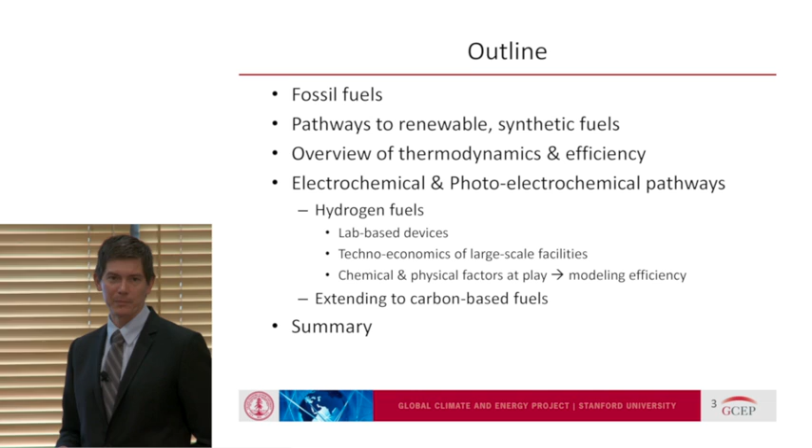Okay, that's the global consumption. And very importantly, 80% of that is coming from fossil fuels—one way you could define a fuel. Fossil fuels: coal, natural gas, and oil—solid, liquid, and gas. The convenient thing about this analysis is that globally speaking, oil, coal, and natural gas each provide about one-to-one-to-one energy across the globe. It's not exactly that, but it's a good first order approximation.

Of course, energy consumption is continuing to grow. So one of the main points I want to make is that fossil fuels are the dominant form of energy across the globe. If we could produce these types of fuels in a more renewable and sustainable manner, that's already plug-and-play with our entire infrastructure, and it avoids all the issues that fossils bring with them. That's why synthetic fuels are interesting, generally speaking.

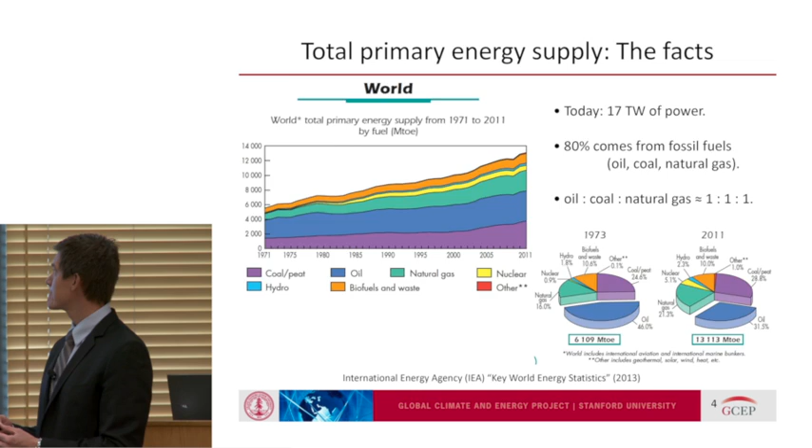Let's talk about fossil fuels in a bit more detail. I want to go through a few thoughts on why I think fossil fuels are so wonderful, actually. So let's consider petroleum and gasoline.

First of all, it's a massive worldwide resource. If 17 terawatts is coming from fossil fuels, at about one-to-one-to-one of oil, coal, and natural gas, making up that 80% total, then about 5 terawatts is coming from petroleum alone. That's a massive amount of energy. There are always concerns globally about running out, but my goodness, we use it quite extensively.

It also has a massive energy density. You can drive a car about 500 miles on just one tank of gas—not some super massive gasoline tank car, just a Toyota Camry or Honda Accord with an 18-gallon tank. And you can fly a commercial jet halfway around the Earth. If I needed to get to Frankfurt in 15 hours, I could race to the airport right now and catch a flight there without refueling or stopping. It's amazing how much energy you can put into these vehicles.

A full tank of gasoline in a car is approximately equivalent to the potential energy of 1 million gallons of water sitting 200 feet above my head—imagine that crashing down on us right now. It's also about the electrical energy stored in 80,000 iPhone 6 batteries. Just one tank of gas, in just one car, like a Toyota Camry.

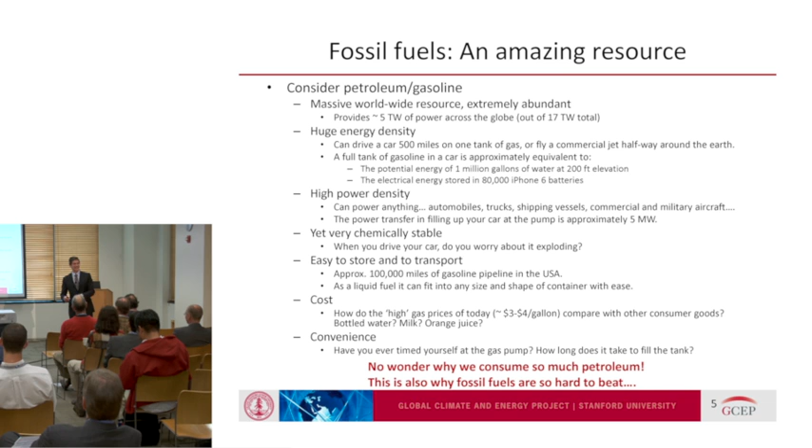So I get in there, and I pull out my credit card, and I'm trying to be fast, and it takes me 3 minutes. 3 minutes from the time I hop out of my car, I've paid for the gas, punched in my zip code, stick it in, fill up my tank, and pop it back in. Remember, it's 6 gallons a minute. So if you have a 15-gallon gas tank and you go in at a quarter tank left, that'll take less than 2 minutes probably to fill. So it's actually really, really fast.

So 3 minutes in and out of a gas station - how much time, if you had no life on your cell phone battery and you plugged it in for 3 minutes, would that give you for talk time? You'd be lucky if you could even turn on your phone on 3 minutes of plugging it in, and that's a very low power device. Here, I go from an empty gas tank to being able to drive to Los Angeles in 3 minutes. So these are all the wonderful advantages of fossil fuels.

It's no wonder why we consume so much petroleum, and it's also why these things are so hard to beat. Fuels are absolutely amazing and spectacular, and of course they come with a lot of baggage - a lot of problems with fossil fuels. So we have to find other means of using energy, producing energy, converting energy. But this also motivates: if you could produce a fuel that does all of this for you, but doesn't have a CO2 issue, a climate change issue, or geopolitical issues, that would be a nice technology to have. That's exactly why we're having this session today - new routes to these types of chemicals without all the baggage from fossils.

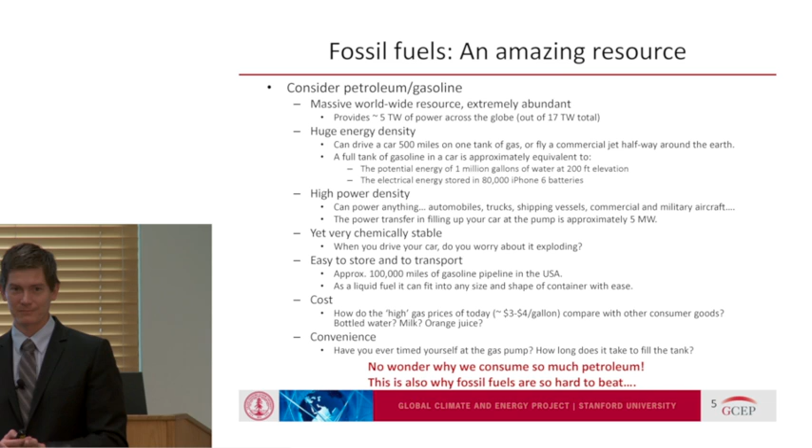All right, so let's talk about what these chemicals look like. Everything we talked about with coal, oil, and natural gas - the simplest description I'd give, if I were talking to a 5th grader, is it's just a bunch of carbon and a bunch of hydrogen mixed together as chemicals. Those are the two main ingredients, and there's a lot of carbon-carbon bonds and carbon-hydrogen bonds.

Now we're going to escalate it to high school chemistry, carbon and hydrogen bonds. When you start ripping out these bonds, that's where you get the energy release. When you burn these things, you get the energy release that allows us to drive our cars.

This is a class of compounds called hydrocarbons for obvious reasons. They have hydrogen, they have carbon. Here we're looking at pretty much the difference between natural gas, the more liquid fuels like gasoline and diesel, motor oil, plastics like your milk jugs, and coal, which is similar though more two-dimensional in nature. It's basically a bunch of carbon-hydrogen bonds. So it's really the same type of bonds that you're burning for all these types of fuels.

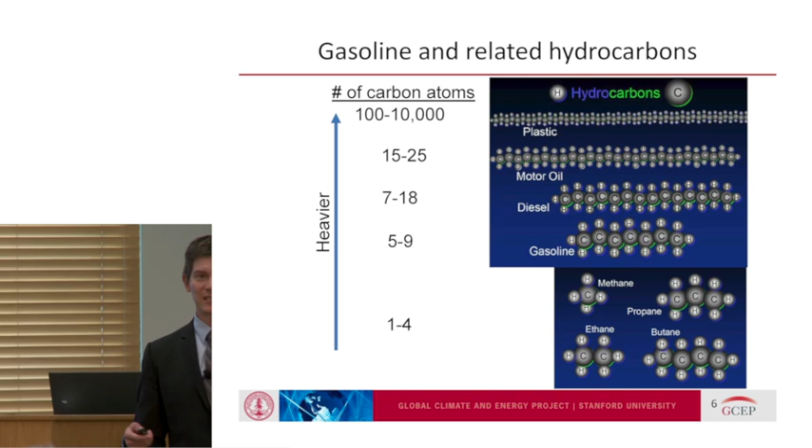These are really small: methane, ethane, propane, butane. This is what you get out of natural gas reservoirs. They're so small that gives them the physical property of being gases at standard temperature and pressure. If you start linking them, you get more liquids, and ultimately you get to solids. But at the end of the day, it's the same type of molecule. These are the molecules that provide all those services we were just describing.

How do we get them? We get them from the ground. We grab oil that comes from underneath, and it's not like there's this big swimming pool of oil down there. These are basically rocks. The rocks are very porous, and infused inside the pores you have these molecules, and we find clever ways to flush them out from inside the pores of the rocks. We pull them out, pump them out, and put them into an oil refinery, which is one of the most spectacular examples of modern technology.

When I was growing up, I used to see refineries and thought they were just the ugliest thing, a bunch of concrete and metal. But now I realize what they do and how well engineered they are. One single facility can take in 150,000 barrels a day of crude and do all the chemical processing needed to make them usable in different technologies, whether it's a diesel truck, aviation, a jet, a car, asphalt, or to grab sulfur. It's amazing, and these chemical plants are extremely important.

There are about 700 refineries worldwide. Each one takes in on average about 100,000 barrels of oil, just to give you a sense of scale. We do this every day without even thinking, because they're optimized and engineered so well. It's really a marvelous technology.

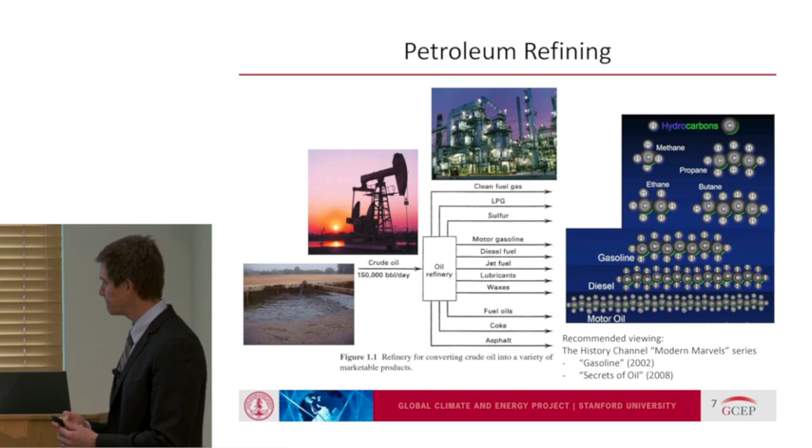What if you wanted to synthesize diesel or gasoline but couldn't use petroleum? This is another definition of synthetic fuels, a more conventional approach. Basically, if you can make carbon monoxide, CO, and hydrogen, H2, we have large, well-working industrial modern processes that can convert that carbon monoxide and hydrogen into just about any liquid fuel you'd want.

If you really wanted to, you could grab something like coal, or even biomass. You could grow plants and feed them into a process where you effectively make your carbon monoxide and hydrogen. Then you use another reactor for water gas shift, and then do what's called Fischer-Tropsch and some product upgrading, and out the door come things like naphtha, diesel-type molecules—all the things we would conventionally get from petroleum.

What I'm showing you here already exists at large scale. There are plenty of chemical plants around the world, $10 billion to $20 billion investments, that can do exactly that. You can feed them biomass, waste, natural gas, or coal, and they can basically make these liquid fuels.

Could you briefly explain what water gas shift is? Sure. Water gas shift is: if you feed CO and H2, you can shift the stoichiometry to CO2 and H2, balancing out hydrogen and water. So the reaction is—I should have written it out.

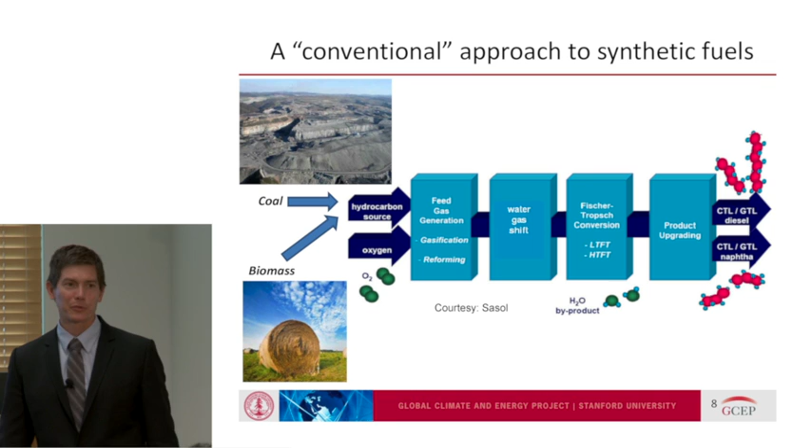Question: How is that different from steam reforming, or is it? Steam reforming is a process where hydrocarbons are coming in. So steam reforming would actually fit into this box of gasification and reforming, where that's what's going to produce your CO coming out here. When you reform methane, for instance, you're producing the CO and H2 that then goes into the water gas shift, and the water gas shift will tilt the balance how you want it, such that it can do the rest of the chemistry to make the product you desire.

Excellent, great. So those are conventional processes. Let's take a look at the map of these different fuels one might want to make. This is volumetric energy density, megajoules per liter, plotted against gravimetric energy density in megajoules per kilo.

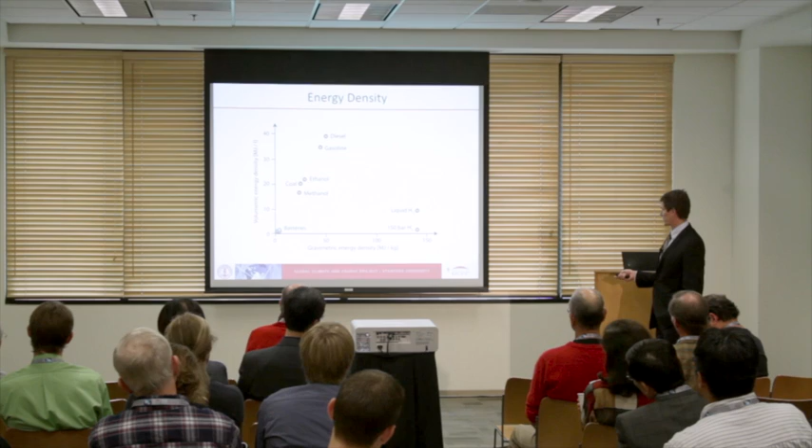Here's diesel and gasoline, and as you can see, they're phenomenal on both metrics. They're very great fuels from an energy content standpoint. I already described how wonderful they are in terms of energy density. Batteries are down here, just so you know. And by the way, I'm not trying to say that fuels are always better than batteries. I think in this game of energy, you can't just put all your chips into one bucket of possibilities.

If we're ever going to compete with fossil fuels globally - this is now more of a personal opinion on the matter - I don't think we can look for that one silver bullet that's going to take care of everything. I think we need a combination of technologies. And batteries have a tremendous role to be played in all of this.

But if you want to look strictly in terms of energy density, clearly these chemical bonds in hydrocarbons are much more rich, and the chemical bonds in hydrogen as well. So H-H bonds are fantastic sources of energy. You can see on a gravimetric density basis, they're huge. But on a volumetric energy density, they don't compare nearly as well, because hydrogen doesn't want to be in the condensed phase - it much prefers to be in a gas. Whereas these are very natural liquids.

So everything you see here - diesel, gasoline, coal, methanol, and hydrogen that we produce - everything except for ethanol, all these other chemicals are all coming from fossil fuels today. That's the modern situation. Any hydrogen that comes around - we'll talk more about hydrogen in a bit - that hydrogen is really coming from the ground ultimately, usually from natural gas. Ethanol is the one exception. There really is no good industrial process to make ethanol from syngas, as I talked about on the previous slide. If you can make carbon monoxide, you can make hydrogen.

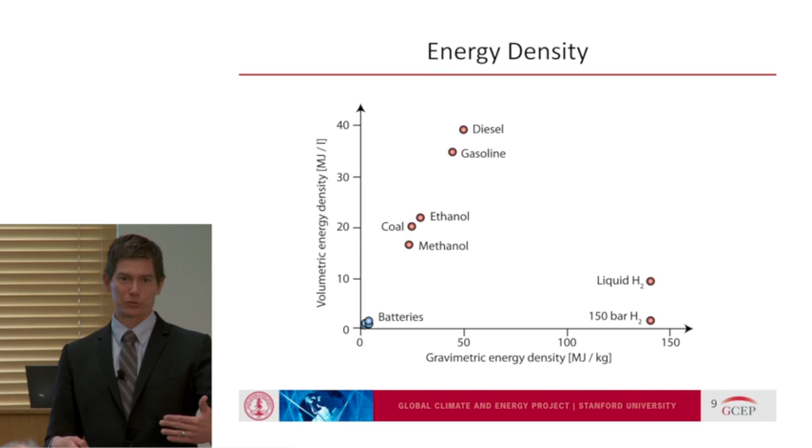Okay, so this is the broad vision. Those of you at the technical talks yesterday saw this slide where we want to make these types of fuels — wonderful in terms of energy density. Let's think of a black box as your typical engineering analysis. You feed it three things: sunlight, water, and CO2. We know there's lots of sunshine coming down on the Earth — orders of magnitude more energy striking the surface than we actually need, so even grabbing 0.1% of that would put us in great shape. Water is extremely abundant, we're all breathing it right now, and of course we're all breathing CO2 as well, at 400 parts per million and climbing.

So you take these feedstocks, feed them into this black box, and ask it to break apart some bonds and reform bonds elsewhere. Then you can make things like oxygen as one output stream, which is something we all need — not a bad product, though it has very low value since we get it for free from the Earth. But then there are things we conventionally get from fossil fuels that would be great to instead get from these renewable sources: hydrogen, carbon monoxide — this is pretty much the water gas shift type of reaction we're talking about. We can also make alcohols, hydrocarbons. These are all very good fuel molecules.

So option one is you can use anything on this slide, plus a whole lot of other possibilities, as fuels. Or you could use them as chemical products — a lot of these are important chemical products for the manufacturing industry. Or if you didn't make the exact thing you want, you could use these as chemical precursors. Hydrogen, carbon monoxide, methanol, ethylene — these are what we call platform chemicals. If you can make these chemicals, you can plug them into the modern chemical infrastructure and it'll crank out just about whatever you want. So we have a lot of control there. That's the broad vision.

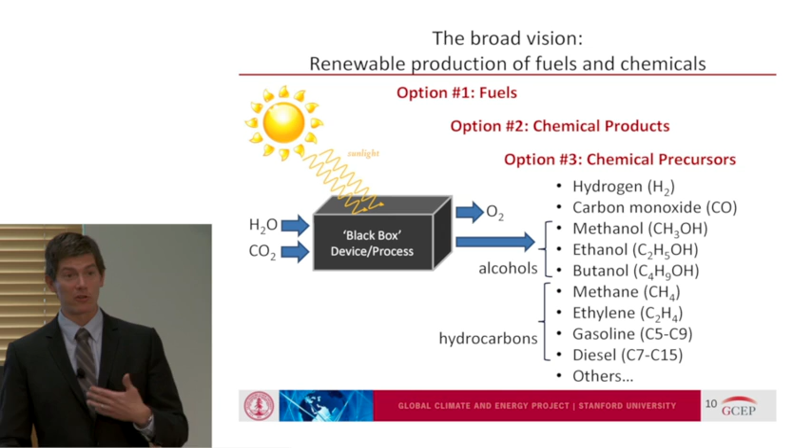Plenty of different ways to do it have been shown in the laboratory. The question is, what's going to be cost effective? Because if it can't compete against the price of fossil fuels, it's going to be a big uphill battle. So some are going to have inherent advantages along that direction compared to other technologies. That's very important to bear in mind.

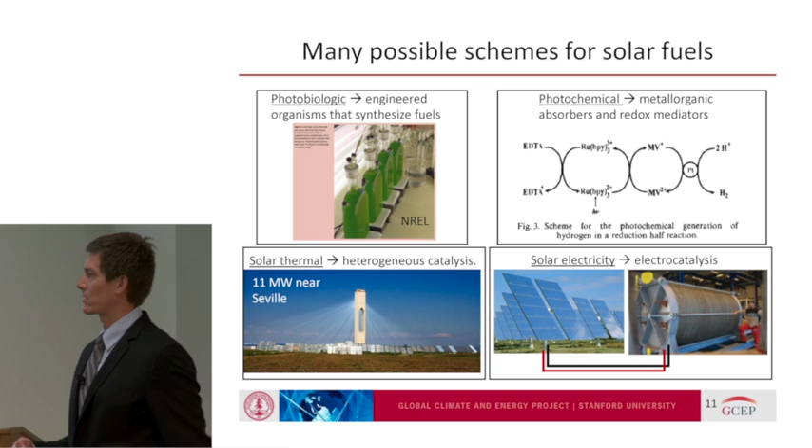There's a lot of ways that you can synergize technologies, and that's up to our own imagination and creativity. What I'll be talking about today, because there's a lot to be said about all these technologies, I want to focus on a couple of schemes that I think are particularly promising.

One is very related to what I just showed on the previous slide: you take conventional energy technologies like wind and solar, which are obviously being deployed massively across the globe already. Can you make a device such that it's cost effective to feed in water or feed in CO2 plus water, and then make the fuels and chemicals that we need? If it came from CO2 from the atmosphere, it's perfect, because then you make a fuel from atmospheric CO2, you combust it in the car just like you always would, and then it just goes right back in the atmosphere that you can recapture, and now there's no net emissions of CO2 in that cycle. You're recycling the CO2. That's one way to do it.

Another way to do it is to have, instead of two separate devices, one integrated device. This basically looks like a bunch of semiconductors, a bunch of photovoltaics dunked under water with some source of CO2. You shine light, and your semiconductor does the same thing that this semiconductor does, where you excite electrons. But in a typical photovoltaic, you're running these electrons and the positive holes that are left behind around a circuit and getting voltage and current out of it. In this case, you're not running them around a circuit. You're just instantly using that electron and that positive hole to do redox chemistry, to do the chemical transformations needed to go from CO2 to methanol or water to hydrogen.

So these are the two types of technologies I want to focus on. A major issue with this is making good catalysts for these chemical transformations. Another one is making good semiconductors that can absorb light and do all the processes you need it to do.

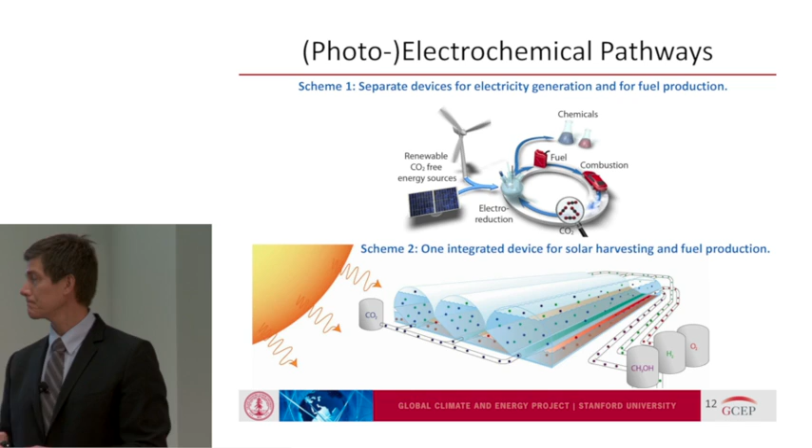So let's talk a little bit about that chemistry, and then I want to get into some of the technical aspects for a moment. I will zoom back out and we'll look more into the big picture in a moment. So don't let these slides scare you too much.

So what we're looking at is a bunch of reactions that we would like to drive. I mentioned the electrocatalysis 101 tutorial that I had given a couple of years ago, where I went into this in great detail—that's for those of you who might want to take a look if you want to beef up your knowledge in this area. But for now, I'll just go through this so that we can capture what we need to move forward and understand the big picture better.

So if you want to make hydrogen, here's one way to do it: 2 protons plus 2 electrons goes to hydrogen. We're going to put this on a voltage scale, which by definition we're going to define this reaction at 0 volts, meaning that if you had an electrode and stuck it under water at 0 volts potential, the backwards and forwards reaction should be going exactly equally fast. Then you can tilt which direction you want it to go—either protons plus electrons goes to hydrogen, or hydrogen gets oxidized to make protons and electrons. You can tilt it based on where you stick your electrode potential versus that 0.

Now here's a bunch of very interesting reactions with CO2: CO2 to carbon monoxide, methanol, some hydrocarbons, some alcohols. These are all really nice things that we'd love to be able to make from the CO2 and water that we're breathing right now. So we're going to pay really close attention to these reactions. And then this other reaction here is going from O2 plus protons plus electrons to water, or the other way around—you split water and you end up with oxygen, releasing some protons and electrons.

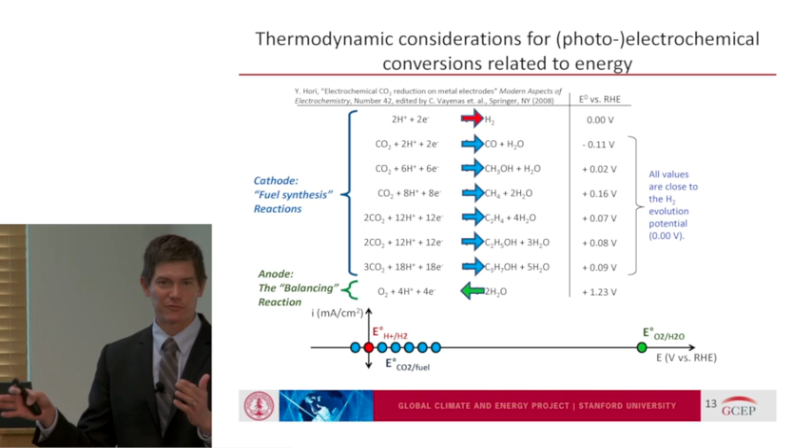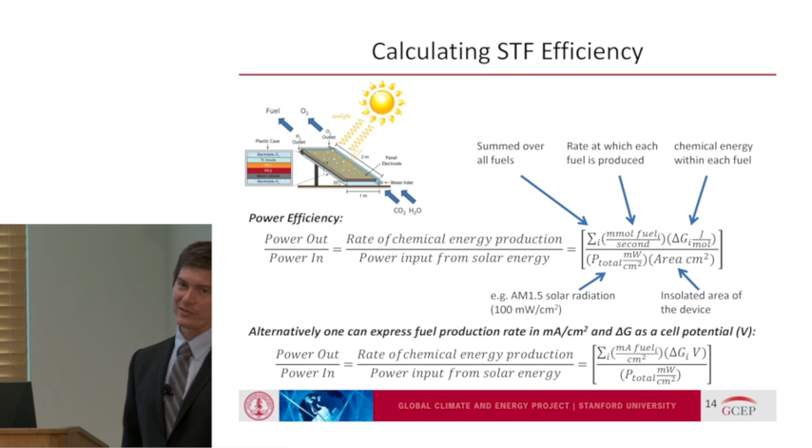Alternatively, there's another way to express all of this. You can express your delta G rather than joules per mole or kilojoules per mole as a voltage, like from the previous slide, and then multiply voltage by milliamps, which is a rate of reaction, how many milliamps per square centimeter you're making your fuel. Multiply those two and you get milliwatts, then divide by the milliwatt per square centimeter of the solar radiation. That's another way to come up with this expression.

Obviously efficiency will always be an important parameter. This is STF, solar to fuels efficiency, and this is true for any scheme. No matter how you make your fuel, if sunlight is your input, this is how you can define an efficiency.

If you want to use solar to hydrogen efficiency as an example, then you just plug in the numbers for hydrogen, which is 237,000 joules per mole and 1.23 volts, and you can get your efficiencies. Of course, an expression like this would insinuate that 100% of your current goes to water splitting instead of some byproduct.

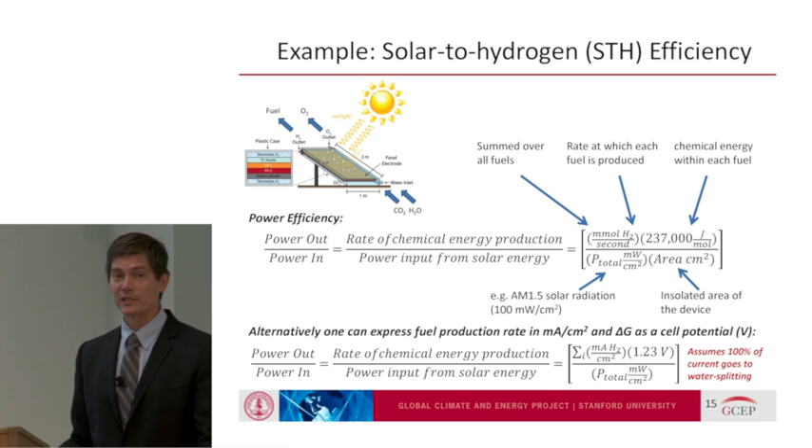So what did we talk about? We talked about fossil fuels, pathways to renewable synthetic fuels. We motivated by saying fuels are great, we'd love to make them renewably and sustainably. We talked about some of the thermodynamics we need to consider and the efficiency involved. Let's start talking a little bit more about the technology in these domains of electrochemical and photoelectrochemical pathways.

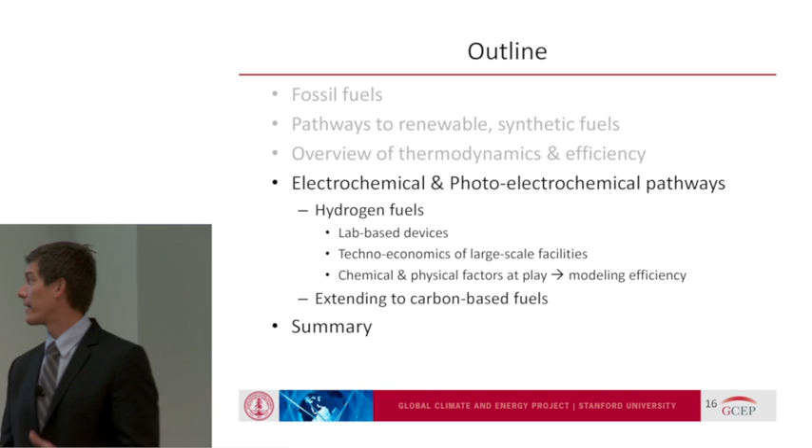Let's talk about hydrogen first, because that's where the technology has developed fastest, and we can leverage that when we talk about extending it to carbon-based fuels.

So hydrogen, first and foremost, if you walk away remembering nothing else, remember that we already use an awful lot of hydrogen. In fact, in 2007, we estimated consumption at about 65 billion kilograms that year. And we all know there's 7 billion people on the face of the earth, so that means every man, woman, and child was responsible on average for 9 kilograms of hydrogen being made per person. That gives you a sense that if you could make that hydrogen renewably instead of from fossil fuels, you could put a dent into the energy problem. That's how I view numbers of that scale.

So it's about a $100 billion industry and already represents about 2 to 3% of global energy consumption just going to hydrogen production.

Is it mostly used in chemical synthesis? Absolutely. What chemicals do you think we're making? It is used in plastics, fertilizer and petroleum. Absolutely, those are the two biggies. So ammonia synthesis to feed people, right? We would not be able to sustain 7 billion people on the face of the earth if we relied on the standard nitrogen cycle.

The Haber-Bosch process takes the nitrogen that we're breathing right now, the 78% in air, and combines it with hydrogen that comes from fossils, usually steam methane reforming, so from natural gas. To make the hydrogen, you put H2 plus N2 and do all that catalysis to then make ammonia, NH3, and of course that's the primary ingredient of fertilizer.

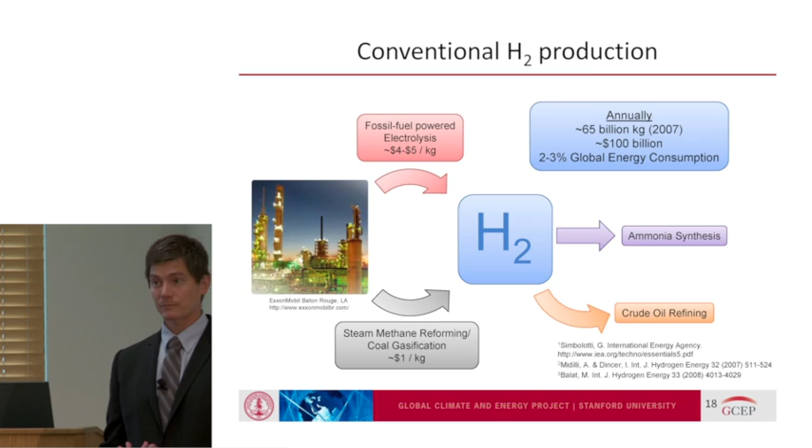And I wanted to just give you guys a really quick state of fuel cell cars today on one slide.

Fuel cells have had a really interesting history. About 20 years ago, nobody was thinking about the energy problem. Then about 15 years ago, around 2000, people started realizing something might be going on, and hydrogen came into the spotlight. People were saying hydrogen is going to save all of us, with hydrogen cars, etc. But that technology was not ready for prime time, and it took a beating as a result. It just wasn't ready for that type of discussion.

A lot of excitement over fuel cells really waned between about 2005 and 2010. The federal government started backing off of it too. But a really interesting thing happened: the car companies didn't back off. In fact, they kept pushing forward. And all of a sudden the government said, whoa, GM is still working on this, Toyota is still working on this, and Honda is still working on this.

So where are we today? Now there's been over 3 million miles driven on hydrogen fuel cell cars, over 27,000 refuelings. Basically almost every major manufacturer is putting out these cars. Hyundai just announced 500 Tucsons on hydrogen fuel cells being leased now in California. And Toyota just announced that the very first commercial fuel cell vehicle goes on sale in California in 2015.

So here it is. Now you can actually buy a fuel cell car, which you couldn't say even a year ago. It's going to be about $65,000, which isn't cheap. But these things get a range of 300, 400 miles, and they fill up in about 5 minutes. Sounds like a gasoline-powered car.

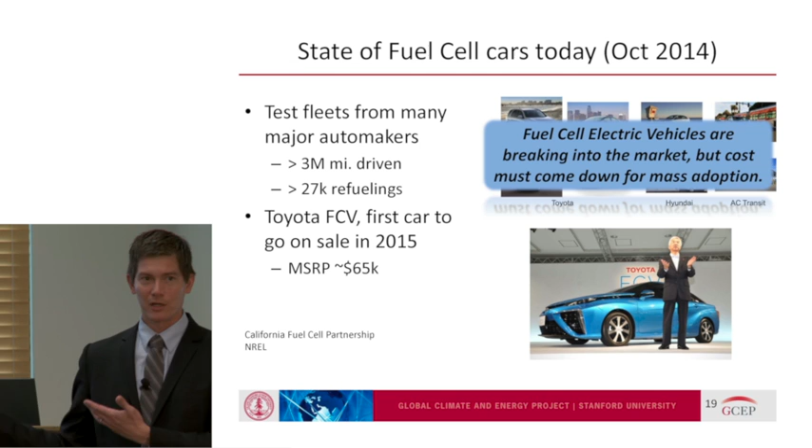Yes, sir? What has been the basic problem with fuel cells? It seems they're a little like fusion, that it's a great technology that's been talked about for 20 years and always will be. Is it cost? Is it reliability? Is it safety?

The first thing I would say is it's nothing like fusion, because cold fusion hasn't even been shown, if you were to ask me. Whereas fuel cells definitely could work 20, 30 years ago. The technology worked, it just didn't last very long. It died quickly, it didn't have high performance, it didn't generate enough voltage, enough current, and it was really expensive.

And so for all those reasons, what people have really been working on, especially in the car companies, is pushing that technology to: A, last longer; B, provide as much power as possible with smaller devices; C, get rid of precious metals, because precious metals are obviously costly. Your typical fuel cell car, I don't know if they've publicly announced exactly how much platinum is inside that fuel cell, but the numbers I've heard are as low as 30 grams, and the highest number is 50 grams.

A gram of platinum costs about $50. So do some mental math, that's like $1,500 to $2,500 worth of platinum in your fuel cell car, which might sound like a lot, but it's actually not too bad. It used to be an order of magnitude more, like $10,000 or $20,000 worth of platinum, and then you can see why it was so expensive. But if you compare it to a battery in a Tesla, how much does the battery pack cost? That's tens of thousands of dollars. So $1,500 to $2,500 for platinum is not so bad.

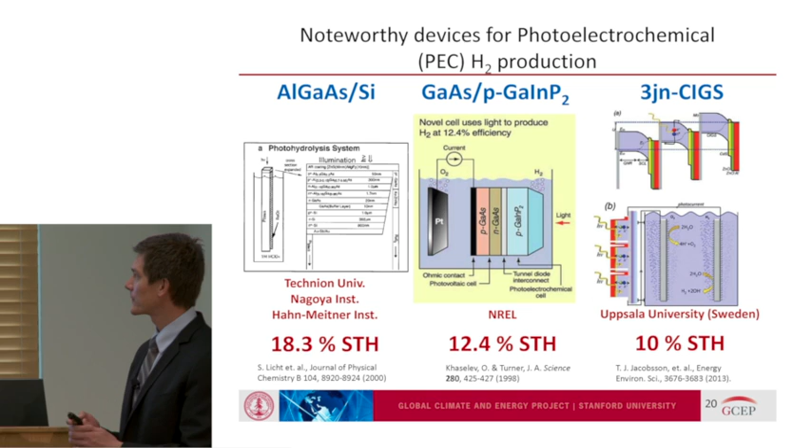So the point is, these are not pie in the sky devices. These have actually been developed by people who work on these technologies in the lab. I want to show you this video from my buddy Todd Deutsch, who's over at the National Renewable Energy Lab. This video will give you a sense of how this works.

So here's a real photoelectrode that he's illuminating, and these are hydrogen bubbles coming off. He's just shining light onto this photoelectrode. The light comes in, you're exciting electrons and holes, and those electrons are going into water to make H2, while oxygen is coming off of that counter electrode.

And Todd is kind enough to turn on the lights and show us that he doesn't have like a 9-volt battery in the back doing the chemistry. He's just shorted the two electrodes, one of which is the anode and the other the cathode that I was describing earlier. He also wants to prove that he's not doing it with some super-powered lamp. He can take this outside in Golden, Colorado, and show that just the regular sun there can do this too.

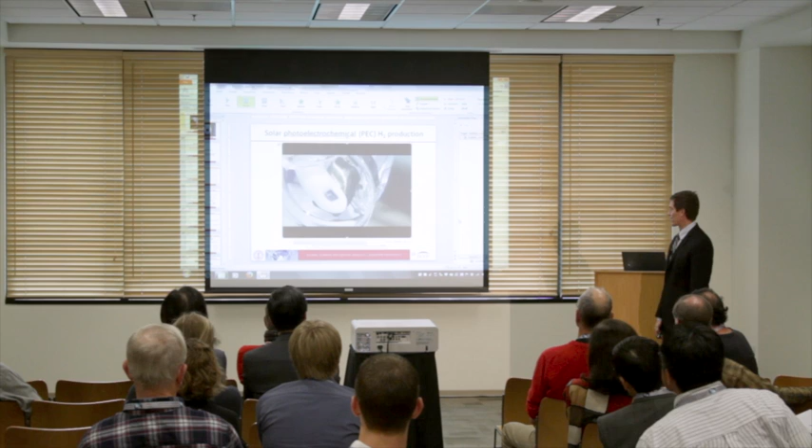Can you concentrate solar light and drive that faster? You absolutely can, no question about it. And I'll show you there actually are good reasons why one might want to do such a thing. Okay, so that's kind of a real demonstration.

All right, so now, great. So this is not pie in the sky chemistry. We can actually make these materials. We can make these devices. They actually do work in the lab, but nobody's ever built a huge facility to actually make hydrogen industrially by this process. How much would that cost, right?

Tough to know until you actually build it. But you can definitely do some analysis to give you a sense of how much it would cost before you go about building a plant. In fact, that's how every company in the world works, right? You always estimate the cost before you build anything.

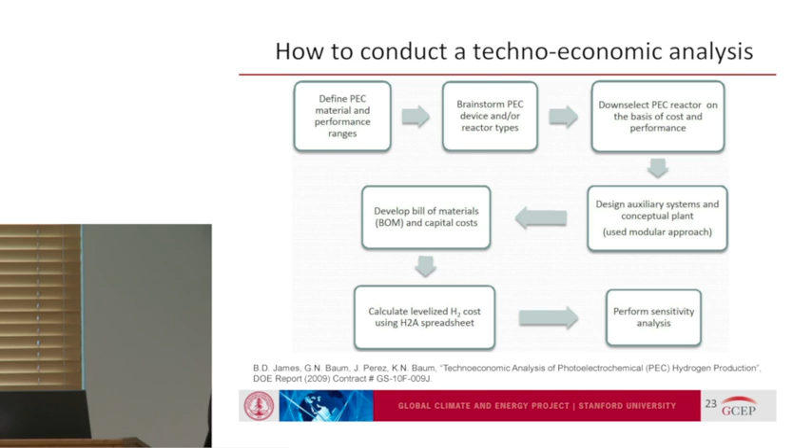So here's the question: how much might it cost to make that hydrogen if it's produced by this large-scale photoelectrochemical water splitting? So in this techno-economic analysis, how do you conduct a techno-economic analysis? Here's how we go about doing such a thing.

The first thing we do is, without even having that perfect material or good material—because this is really a materials problem when it comes down to it—while people have made devices that are 18% efficient, 12% efficient, etc., they have other issues. They're really expensive, they're not very durable, right? It's kind of like the story with fuel cells 15, 20 years ago. They just weren't ready for prime time, okay?

We're still not quite ready for prime time on these, but they're getting a lot better. What we can do, even without having that material under our nose, is hypothesize. I've got students in my lab working on this right now. What if tomorrow morning one of them develops a material and hits all the targets for efficiency, stability, and cost? How much would it cost to build a plant based on that material? We can do that analysis without even having the material with us.

We can define some performance ranges, then brainstorm what the reactor looks like. This is like chemical engineering plant design 101, where you design your reactor and chemical plant around it. We thought of a bunch of different types of reactors and down selected which we thought were most promising based on cost and performance. Then you go about designing all the auxiliary systems in the plant—all the pumps, pipes, compressors, and everything else you need to make the plant work. Once you have everything the plant consists of, you can develop a bill of materials and capital costs.

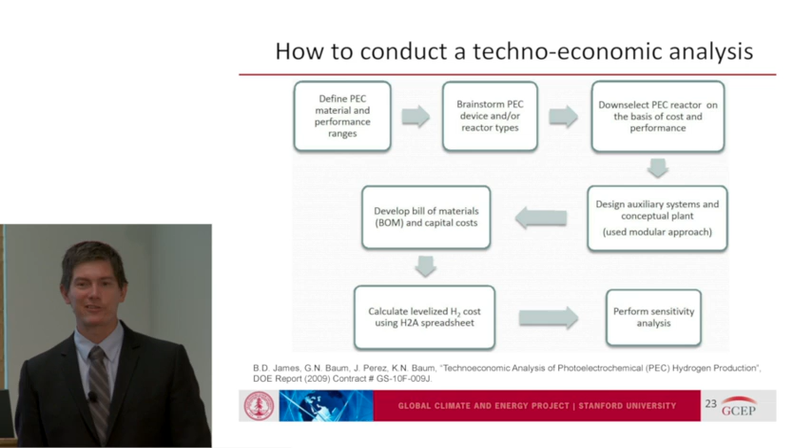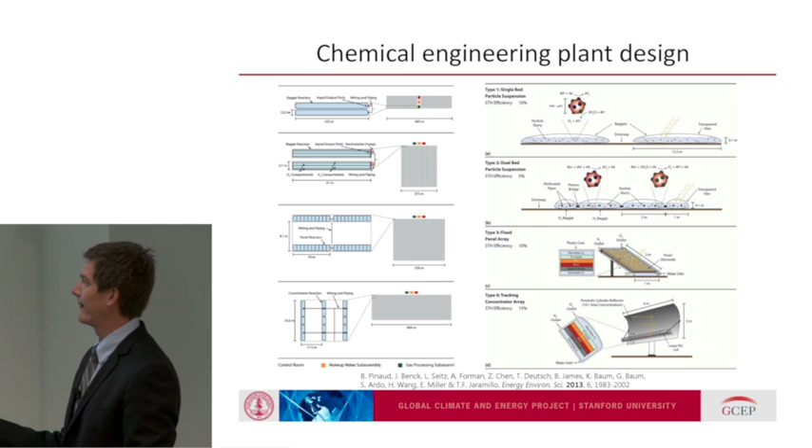Let me lead you through that exercise. This is what we came up with—really four different types of reactors. I'm going to call them type 1, type 2, type 3, and type 4. This is to give you a sense that not only did we design what the reactor looks like, we designed the entire chemical plant. Let me show you in more detail how this works out.

Type 1 is what we call the colloidal suspension reactor. You have a suspended photocatalyst material—like a semiconductor with different catalysts decorating the surface—and we put these in bags. These bags are huge, about 300 meters long by 12 meters wide, but only about 10 centimeters tall, so it's just a small amount of liquid water with the catalyst floating in here. The sun shines, takes that water and sunlight, excites electrons and holes, and makes hydrogen and O2. The bag inflates, and then you have all this wiring and piping to get that hydrogen and oxygen out.

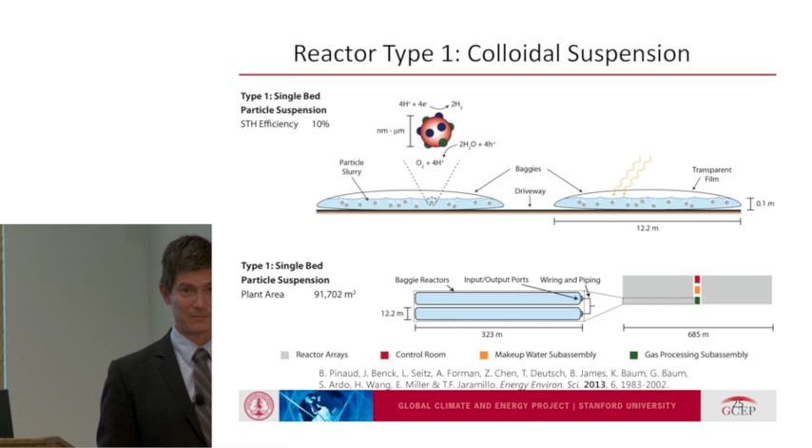You separate it from the water as well, process it, compress it, and voila, you can sell it out the plant gate. Now, one thing about this is it's about as cheap a design as you can possibly think of, but you're making hydrogen and oxygen in the same gas space, and that could be dangerous. Absolutely.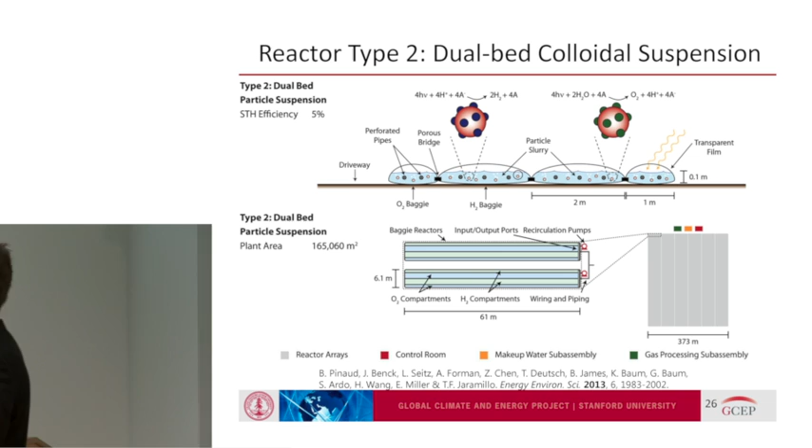Reactor type 2 deals with the issue of hydrogen and oxygen being in the same headspace. Here you've got multiple baggies linked through what we call porous bridges, and now you can have two different types of photocatalysts—one dedicated to making hydrogen in this compartment, one dedicated to making oxygen in this compartment—with some ion that floats back and forth balancing the equations for you. The nice thing is that this one is only inflated with H2, this one's only inflated with O2, and then you pull these things out, still do some separation and compression processes, and sell your hydrogen out the plant gate. This is definitely going to be more expensive from a manufacturing point of view, but you've dealt with separations up front, which is helpful.

Reactor type 3 looks just like a photovoltaic that's dunked underwater. You've all seen photovoltaics that look pretty much just like this, but now we're feeding in water on one side of that photoelectrode, you're making hydrogen. On the other side, you're making oxygen, so you have natural separation of the two products. Pull it out, compression, separations, sell your hydrogen.

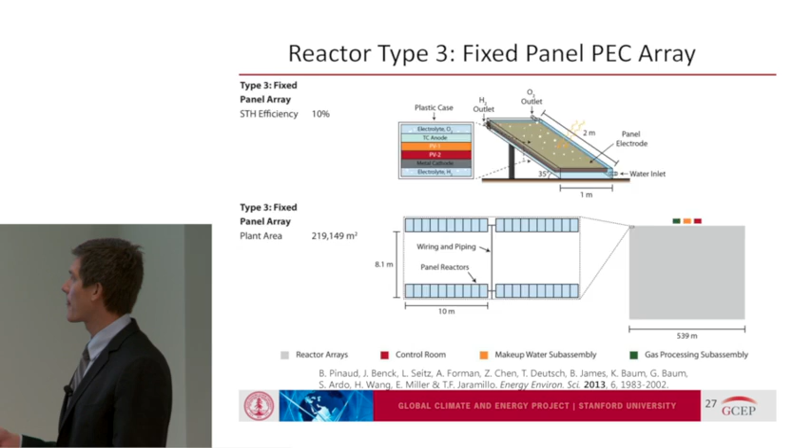And then you can imagine that same type of contraption where you use some solar concentration, just like you were asking. So we did some analysis on this, 10x concentration, not 10,000x or 1,000x, but some modest concentration. The nice thing is that basically you're paying for the mirror. So if this material turns out to be really expensive, you can make that module smaller and just pay for the mirror instead and capture the same number of photons.

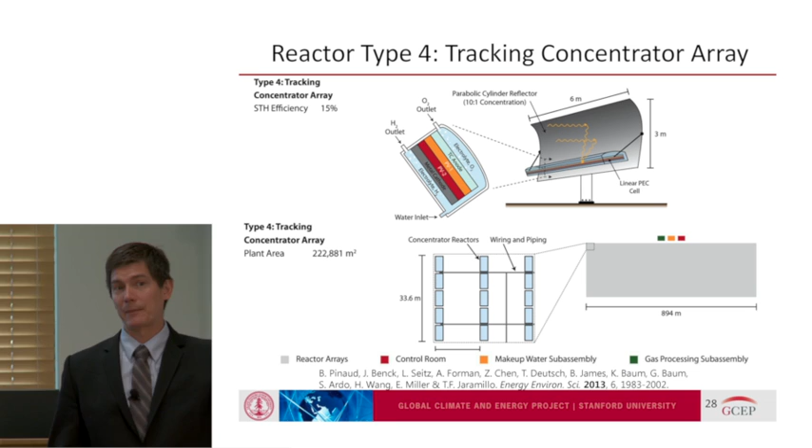So these are the four different types of reactors. How much did the hydrogen cost based on these assumptions? Our target here from DOE is about $2 to $4 per gallon of gasoline equivalent, GGE. This is the way DOE wants to put everything on a level playing field. It doesn't matter if you're working on butanol or ethanol or hydrogen, you can turn it into gallons of gasoline equivalent. The nice thing with hydrogen is that one kilogram of H2 is equivalent almost exactly to one gallon of gasoline in intrinsic energy content. Okay, so these are the numbers.

$1.60, $3.20, $10.40, $4. So clearly the price is very sensitive to the type of reactor you chose to begin with. That's an important result. That's why chemical engineers are important, because you can actually design things and build large-scale systems and figure out what the costs are before you go about building it, so it can help guide you in all of this.

This turned out to be really cheap. The only problem is that this is based on an assumption of 10% efficiency, and I showed you some devices that can operate at 10% and higher, but no one's ever made this type of system anywhere close to 10%. The ones that hit 10% look more like this. These are way cheaper, low cost, but the lab demonstrations are nowhere close to even 5 or 10%. Whereas here, people have certainly made 10 to 15% devices, but these are just intrinsically more expensive because they're more expensive to process, to fabricate these types of modules.

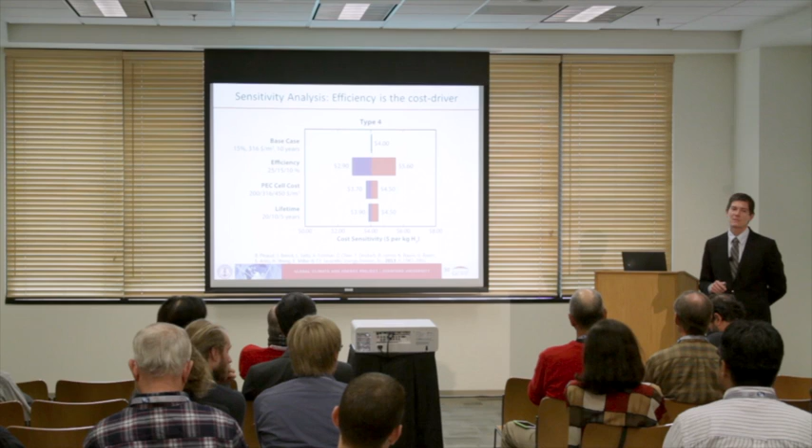Yes? What would be a reference for distribution and final compression? Great question. I'm told by DOE that we can expect that to be about $1.50 a kilo. So if you're making your hydrogen at $2 a kilo, then it would cost actually $3.50 at the pump, which is what we're paying already for a gallon of gasoline. But remember, a fuel cell vehicle gets you a lot more mileage because it's a lot more efficient than an internal combustion engine. So a typical fuel cell vehicle, like the one I just showed you, gives you around 350 miles on 5 kilograms of hydrogen. So it's about like 70 miles per gallon, if you will.

It sounded like you were just comparing the cost here to the price at the pump, which includes profit and taxes and other stuff. Right.

So the price at the pump here in California is about $3.50 a gallon. I think about 50 cents of that is taxes, so $3 of it is the intrinsic cost of producing and distributing it, and the other 50 cents goes to the government.

Is profit in that? My understanding is profits are on the order of 5 to 10 cents per gallon, a typical value. Companies don't typically make their money off the fuels—remember, fuel is a massive market, so huge that even if you're only making a nickel per gallon, you're making a lot of money. Those oil refineries are cranking out 150,000 barrels a day.

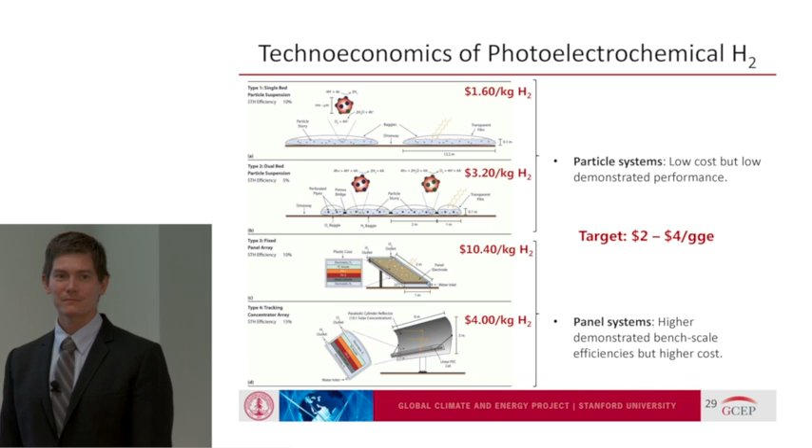If you shine light onto a semiconductor, the idea is you excite an electron from the valence band into the conduction band. You pull these electrons out, and they're the ones that make your hydrogen. The positive charges left behind oxidize water to make your O2.

This process is very similar to a photovoltaic. If you watch the solar energy and solar cell lectures, they'll talk about exactly those types of processes, how sunlight factors into all of this. The difference is they're not doing this type of chemistry—they're just making current and voltage.

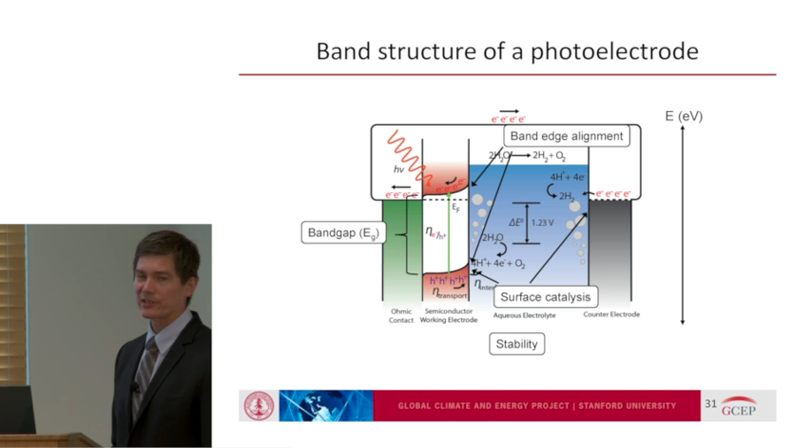You've got to get as much energy out of these electrons and holes as possible. You also have to have good catalysts that can drive these chemical transformations at the surface. I'll skip through some of these other issues—you can do some calculations.

Let's zoom back out again for a moment. You can calculate how efficient you can expect your solar-to-hydrogen process to be as a function of the band gap of your semiconductor—the difference between the valence and conduction band I mentioned before. The optical limit says if you get a small band gap, you can get a really high efficiency device, upwards of 30%. But in reality, there are a lot of losses in this process, which means you're going to have to use a lot more voltage for other things.

And the bottom line is, you can't just keep shrinking the band gap and getting higher efficiency. So we have to deal with this.

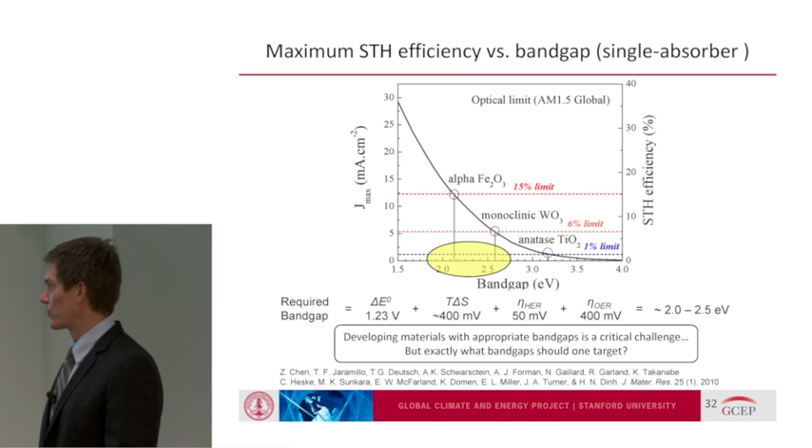I want to tell you about some modeling work that my student Lindsay led in the group to figure out just how efficient these types of devices can be. That's what I want to relay to you today. She put a lot of the important physics and chemistry that happens in these materials into these models.

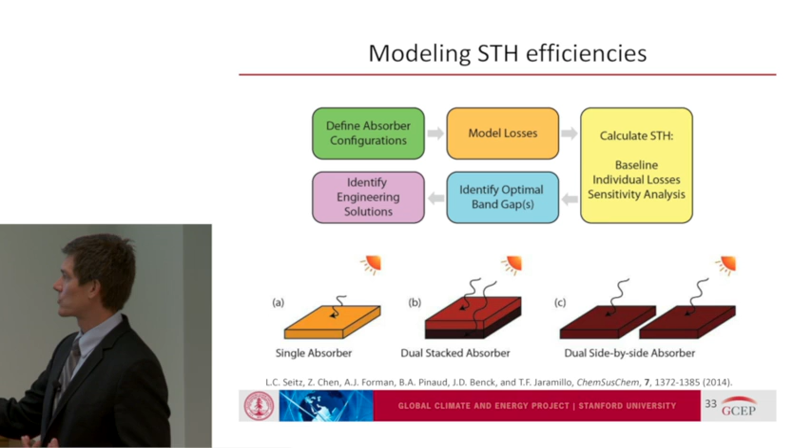She basically defined: do you have a single absorber, or a dual absorber of two different semiconductors, one on top of the other? Do you stick your semiconductors side by side? She modeled all these losses in the physics and chemistry of this, and calculated what the solar to hydrogen efficiency would look like. From that she could identify how to optimize the band gaps of my semiconductors to get the maximum efficiency, or what engineering solutions I can employ to get the most juice out of all of this.

I don't want to go into all the details of how she did her modeling, but I want to mention that she looked at these different configurations. These are the three main losses that she looked at.

Number one: when you excite your electron from the valence to the conduction band, you don't get all that voltage, you get something less. That's known as the open circuit voltage of your material. So she said, okay, how good can that be? How good are your catalysts? And do you have a shunting problem? Shunts are basically when current goes the wrong way. So she puts all this into the model.

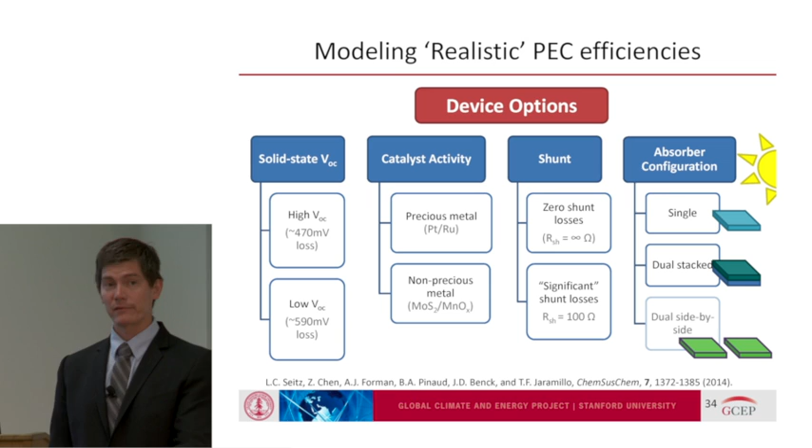Now when Lindsay did this, she did it with a very important assumption. She actually used the current state of materials research today. So if we, as a technological society, can make better semiconductors and better catalysts, then this effectively can get higher and higher.

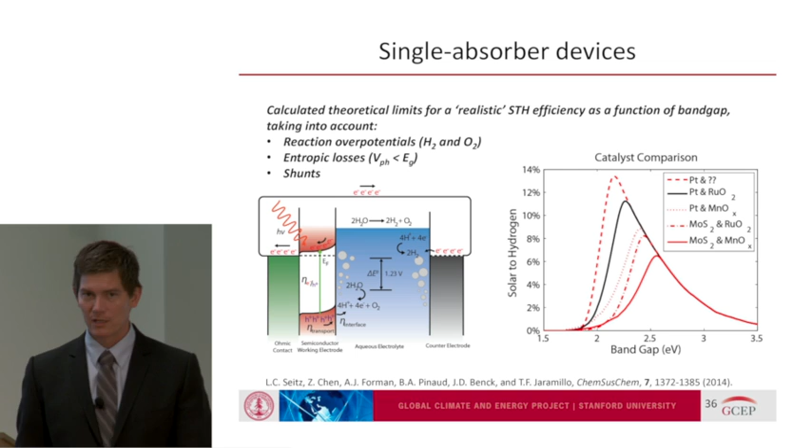She did all this type of analysis for a single absorber bandgap case. She also did this for a dual absorber bandgap case, when you have two different semiconductors employed, which you can do in different ways—I won't get into the details there. But what I really want to point out is that her calculations show that based on the current state of materials research today, in principle we should be able to reach 23% solar to hydrogen efficiency if you can make your materials to the best of technological society's abilities today.

And that's a pretty good number, if you can hit that. It's a very realistic number in terms of how good this technology can get. Again, based on how good we are at engineering materials right now, if we get even better, this number could go to 25, 30%, maybe even higher.

So the point I want to bring with all of this modeling is that it is possible to make these devices on the order of 20% efficient. Remember all that techno-economic modeling I was showing you—25% efficient was kind of the point where, if you can hit that, the costs start looking very good. This shows you that you can get really close based on where we're at today, and maybe even go beyond that.

So having said all this, what does this contraption even look like? Here's one way you can think about it. On the previous slide, I showed that the maximum with one semiconductor was about 11%. If you have two semiconductors, you can get 23%. So two semiconductors is better.

Here is a website to help you get up to speed on these types of chemistries, a DOE energy hub called the Joint Center for Artificial Photosynthesis that I'm part of. They've come up with a contraption like this. You can read a lot about how it works, but there's a question I want to field.

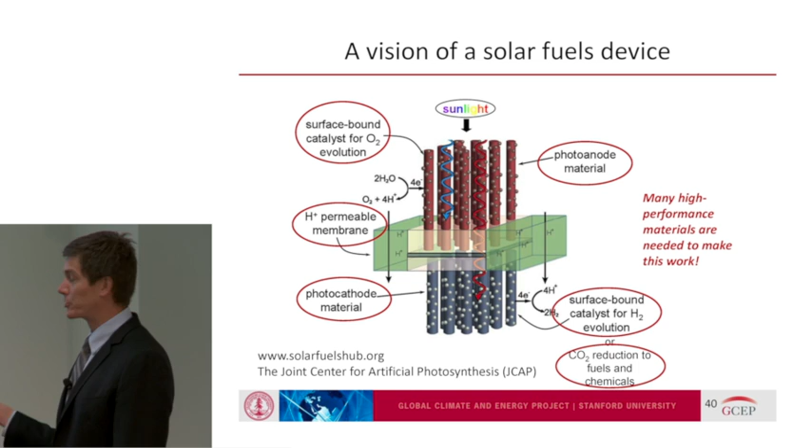So for this very last part, we're approaching the end here. I probably have like 6 more slides to really talk about catalysts, because catalysts are going to be key for all these chemical transformations.

And these are the 3 metrics by which we view catalysts, right? We want them to be active, meaning efficient. We want them to be stable, last for a long time. And we want them to be selective, meaning they can make exactly the product we want and not the products we don't want. So if I were to ask you, which of these is most critically needed in catalyst development, what would you guys say?

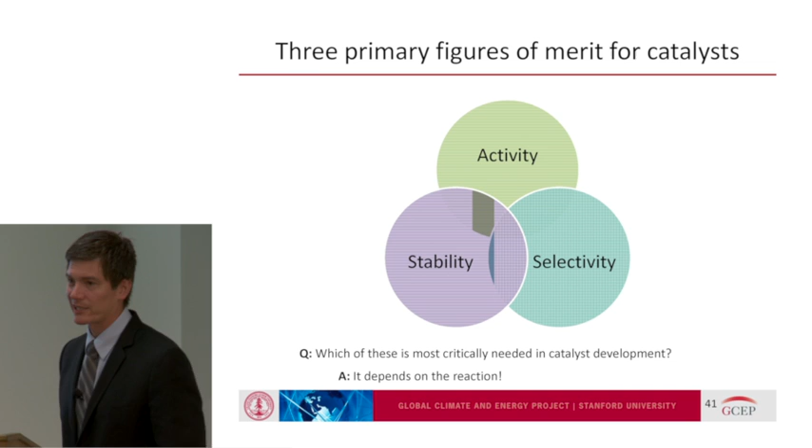Yeah, you need all 3 for sure. But basically, it really depends on the reaction as to what's the pressing need, what's the big challenge, what's the big problem. And so here on one slide, and by the way, these slides have been uploaded as a PDF, so you guys have access to all of this. Here is my summary of electrocatalyst development for making hydrogen, making oxygen, and converting carbon dioxide into fuels and chemicals.

Let's talk about hydrogen. If you want to make hydrogen, the good news is that precious metals basically meet all the performance metrics that we could hope for. So that's good, we have catalysts that actually work. They're stable, they're active, but they're costly, and there's the scarcity issue. So maybe they're not quite scalable, but at least we can use them to start getting this technology off the ground. I don't know if putting platinum in such a device would be able to scale to the 5 terawatt level, but it can certainly scale to the 5 megawatt and the 5 gigawatt scale. So to get to 5 terawatts, you got to go through megawatts and gigawatts. I think that's reasonable, at least we have something we can use that's quite good.

There are non-precious metal catalysts that are pretty good too. They're not quite as active, but they might still be feasible.

Some catalysts are only stable in near neutral or base conditions, like nickel molybdenum alloys, which are pretty good under those conditions. If you're working in acid, there are metal phosphides and sulfides like MoS2 that are quite good. And selectivity is actually not a problem at all for hydrogen catalysts. From a selectivity point of view, hydrogen has no problem.

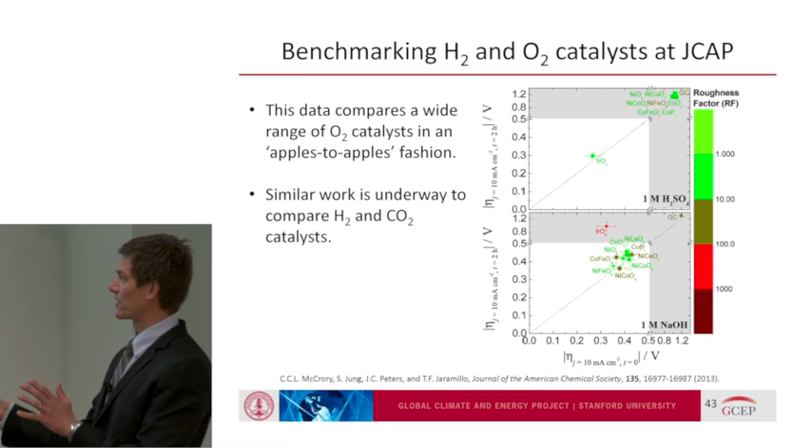I won't go into this data—it's a distillation of everything I just showed you on the other slide, and we don't need to harp on that any further.

For CO2, we already looked at these reactions—these are the ones we want to catalyze. Why is CO2 so much harder than hydrogen? The answer is there are a lot more steps involved. CO2 to methane, for instance, requires 8 steps: CO2 comes down, you hit it with a proton and electron, again, again, again, again—finally you've made your methane, cleared water off your surface, and can go back to square one. The hydrogen process is a piece of cake by comparison, only 2 steps. Making methane from CO2 is 8 steps, and making things like ethanol would be about 12 steps.

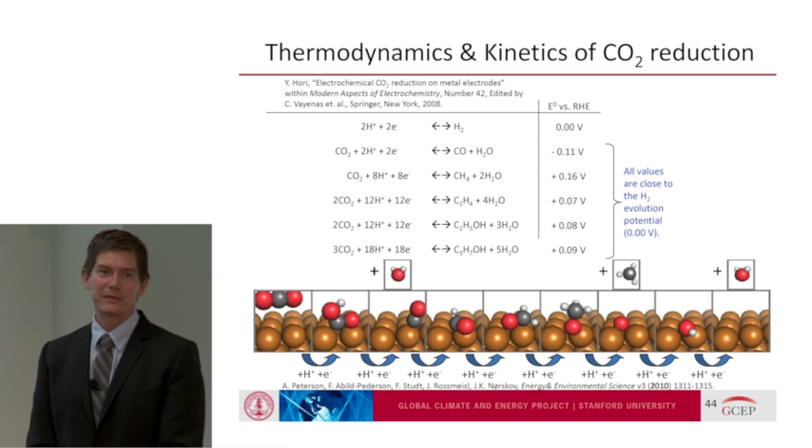The bigger the chain gets, the more steps, the more you're asking your catalyst to do. That's really the challenge in CO2 chemistry—how do you make a catalyst that does every one of these steps just right? Not many catalysts can do anything like that. One of them that can, to some degree, is copper.

I showed this slide yesterday in the technical talk. Basically, copper can make a whole host of very interesting products. It can make things like methane and methanol. It can make all these C2s, ethylene, ethanol, acetate, ethylene glycol. It can make even a bunch of C3s, propanol, allyl alcohol, acetone. It can make a lot of these products.

But there's two major problems with copper. Number one, you really have to dial the potential really negative to get these chemistries to go, so you're taking a hit on the efficiency of the process. The other problem is that you're making them all around the same time, meaning you're just making this big mix of products that you'd have to separate. And guess what? It takes energy to separate molecules. And so this is not commercializable in my opinion.

But the fact that it can actually make these products is what's really interesting. And that's really the frontier right now, in my opinion, of research in CO2 conversion in this way - trying to understand what makes copper tick, what makes other catalysts tick, what are the governing factors at play. The better we understand that, the better we are primed to make a good catalyst.

I didn't go into any of the details, I think, yesterday in the technical session, and for those of you watching on video, GCEP is putting those presentations online for everything we talked about in the technical session yesterday, that is state of the art in the field of CO2 catalysis. So I would encourage you, based on this kind of thinking, to go back and look at that - that would be helpful.

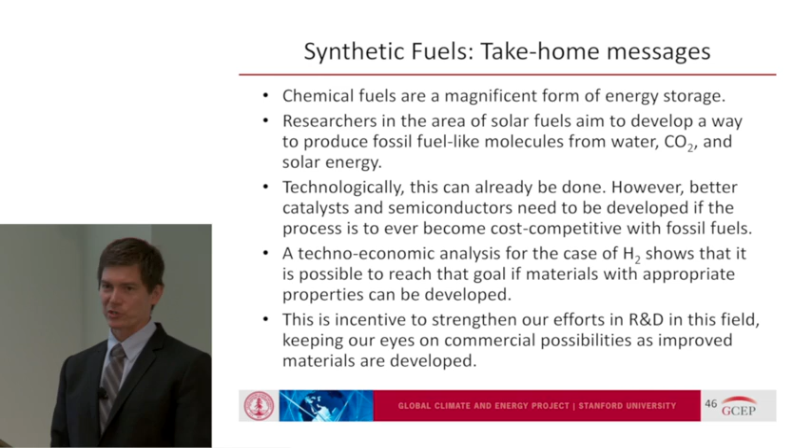So that's really what's driving research in this area. And the bottom line is that's the incentive for us to keep pushing in the R&D world, because if we can make the right materials with the appropriate properties, then we can start building commercial opportunities. Okay, so any questions? Yes, sir.

Absolutely not - it's a wonderful idea. Every idea is on the table. Which renewable resource do you want to use? Do you want to use sunlight? Do you want to use wind? Do you want to use geothermal? Do you want to use biological? Do you want to take an organism, a methanogen, that knows how to do all kinds of interesting chemistries with these types of C1 species? You feed it formate, you can get methane out, or feed it CO and hydrogen, it'll spit something else out.

Absolutely, you can. Or just use the absorber, right? So you could imagine building a solar capture device based on those types of antennas. Sure, people are doing that sort of thing. The question is, can you make it efficient enough, stable enough, cost effective? Those are the challenges. Technologically, a lot of people have worked on these types of concepts. Biomimicry is huge, it's interesting. On one extreme, you have using the biology itself, which a lot of people do - they actually use the bugs and engineer their metabolisms. The other extreme is you stay as far from biology as possible, and you make just things that are rocks.

Like purely inorganic copper and things like that. But there's this wonderful phase space in between, where you can either take principles of biology to make a rock that emulates what the biology does, or you can make maybe a molecular species that you synthesize as an inorganic chemist might in their lab that has some of the design principles from the biological catalyst, but it's still a man-made thing. Or you can imagine hybridizing things.

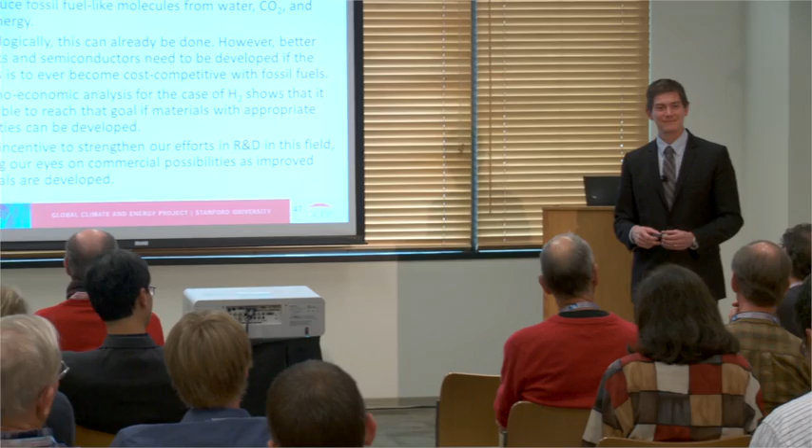Another way to look at it is if you're driving a $70,000 hydrogen car, is $7 a kilo for hydrogen all that expensive? Like I said, even $7 for a kilo of hydrogen basically gives you the mileage of $3.50 gasoline anyway. And if it's produced renewably and sustainably, then it can make you feel good at the same time, as opposed to being a fossil fuel.

That's absolutely correct. In fact, if you lease any vehicles, there's a lot of leases for fuel cell cars from a lot of different manufacturers in the state of California. They actually give the hydrogen for free. So yeah, I applied for one. They turned me down, unfortunately.

I won't name the car company, but I went to their website, and the deal was a $399 a month lease, and for $399 you get a very nice brand of car, commensurate with any car that company would lease - if not, their standard leases would be even higher. For $399, they pay for all the insurance, collision coverage inclusive. They pay for all the hydrogen you would consume and all the maintenance on the car for $399 a month. But obviously high demand because they didn't get back to me, despite all my grant writing skills, as I was filling out my 100-word essay on why I should be the one they should lease that car to.

But did they know you were tenured at that point? I was not tenured at the time I wrote that in the application, but I did try to make a convincing argument that at Stanford University we care a lot about energy. I teach energy classes, I have a lot of great conversations with students who could be potential future customers of said car, and I would show it off, but that didn't work out. I might reapply, now there's more on the market.